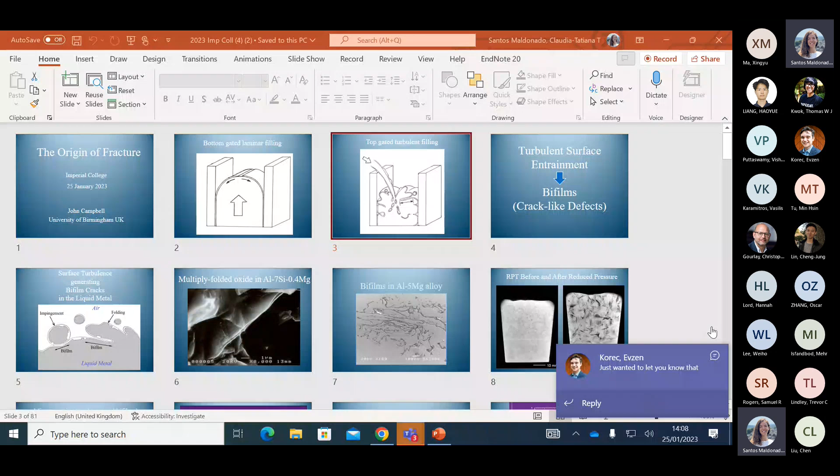They cannot see the presentation. Ah, sorry. Share. Thank you. It looks the same to me.

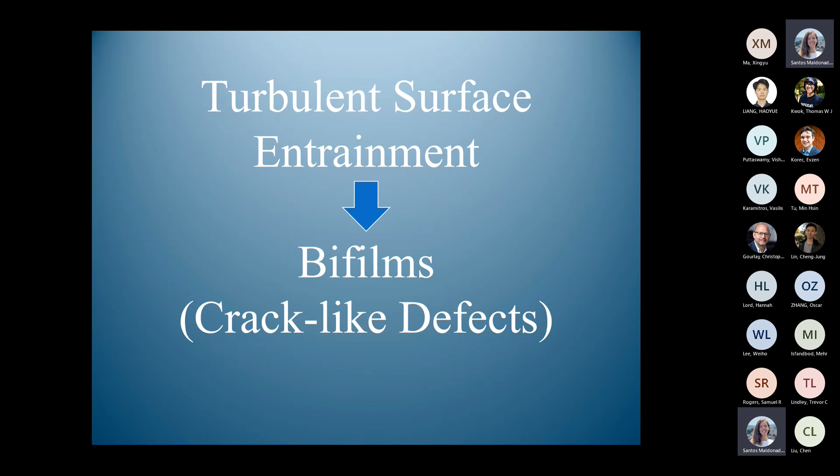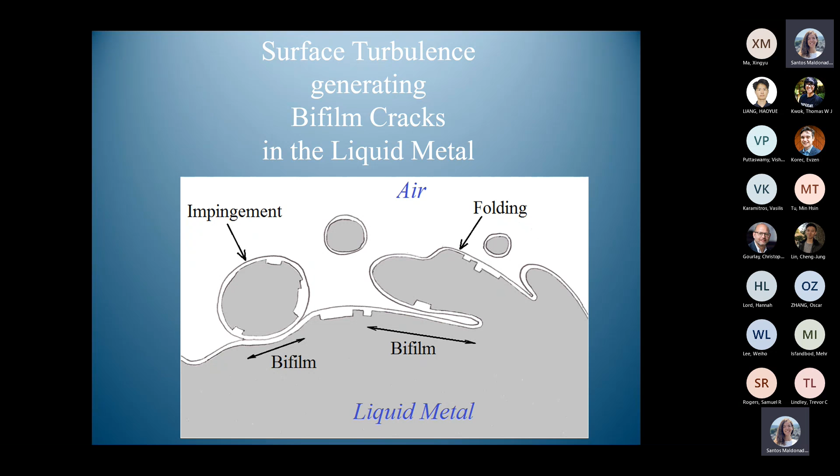Anyway, so this is the reality of our pouring systems. The turbulent surface entrainment leads to bifilms, which are kind of crack-like defects in the liquid. Here's another instance where a folding action produces the bifilm, but also an impingement action leads to a bifilm. All these things lead to double films coming together, dry side to dry side. It's fundamental to the way entrainment occurs. When the surface goes in, it always goes in dry side to dry side.

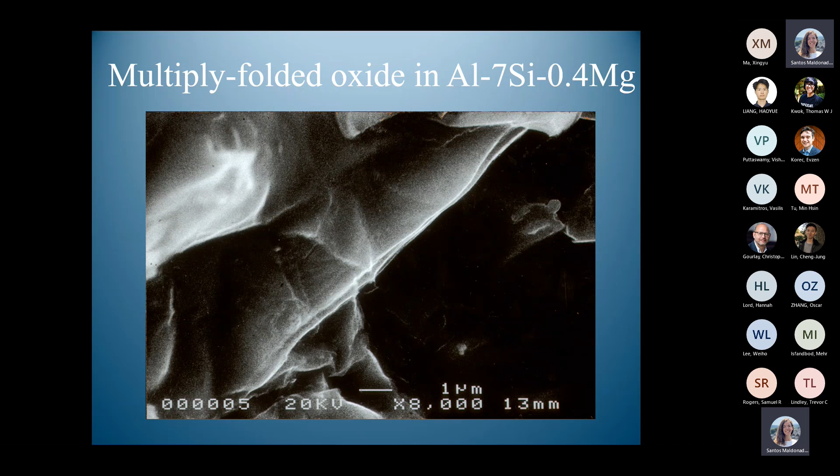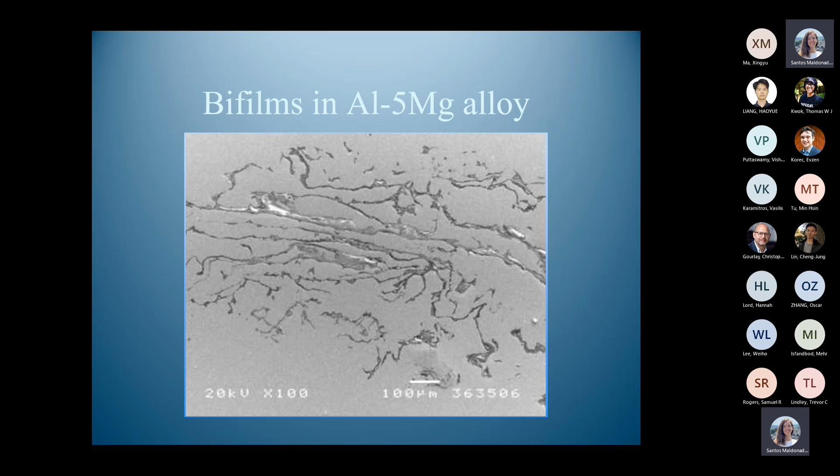And here are some of the things under the microscope. You can see this is multiply folded, and the tiny things here are about 20 nanometers or something. Here's a situation where we've polished the surface, revealing this big tangle of bifilms. Here we've just taken off the top of the film so that you can see the film underneath in places. So it really is a double film.

This was a little experiment that was extremely valuable and helpful to us in the early days, done many years ago. We took two small molds about the size of egg cups, and we poured liquid aluminium into both molds at more or less the same time and temperature, so the two are identical with liquid metal. Over the one on the right, we put a bell jar and pumped down the pressure to about a tenth of an atmosphere — actually, I forget, maybe it was a hundredth of an atmosphere. But anyway, it was a lower pressure, because what we wanted to do was expand the two films apart by lowering the pressure so the air trapped between them would expand, and so we could see them by X-ray, which is what these are.

And sure enough, they popped up, and you can see it's absolutely crammed with cracks that we didn't know were there. Now, interestingly, this is the same metal, poured at the same time, same temperature, same everything, except just a different pressure.

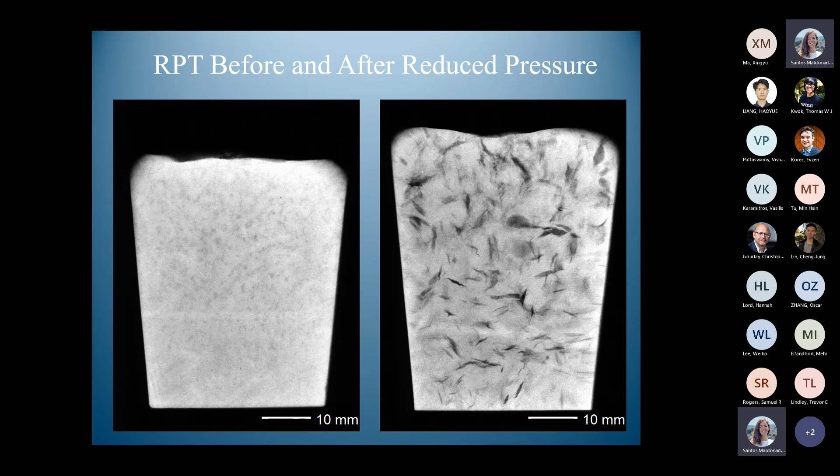When I show this picture to people in the aluminium industry, for instance, they say, oh yes, we get cracks just like this. This is actually a super duplex stainless steel. I show that because this is a problem right across the metals industry. It's not just aluminum, and it's not just steels. It's the super alloys. Nearly every metal alloy system you can think of has this same problem.

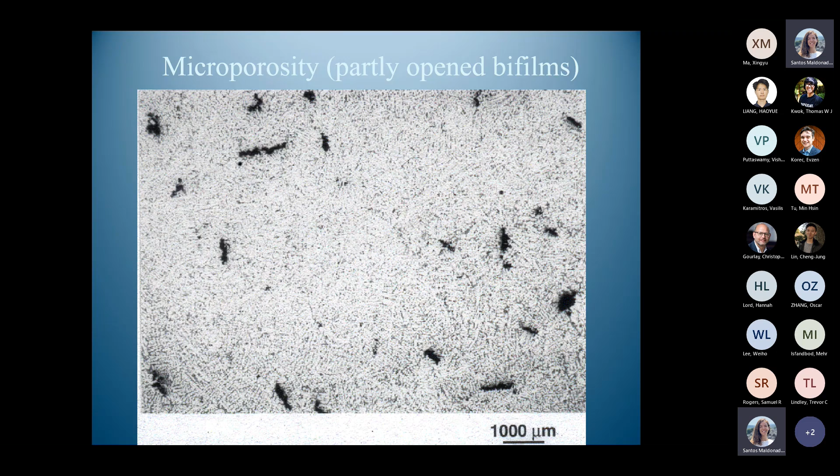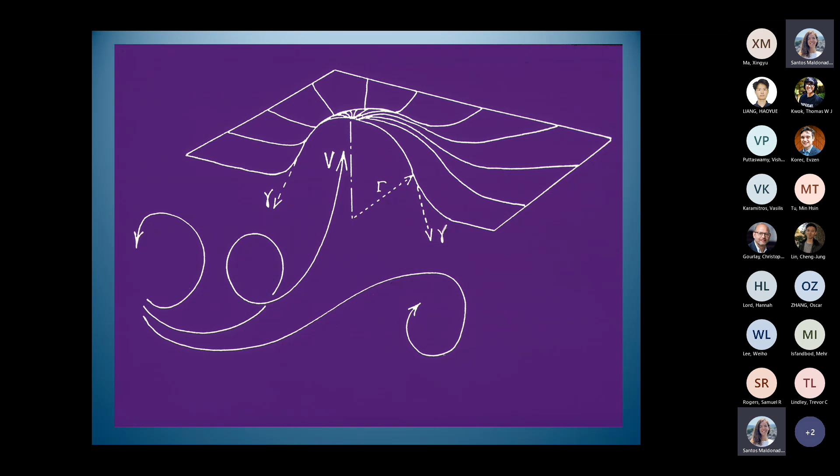We can have a quick look at the simple physics of why it occurs and the critical conditions under which it occurs. If we just look at the surface, it's being tensioned by surface tension to keep it flat, but it's being perturbed by turbulence in the liquid, with a certain velocity. We can write down the critical condition at which these two forces, the inertial pressure in the liquid and the surface tension pressure, become equal.

And we get a critical velocity of 0.5 meters a second. I produced this on the back of an envelope and said to one of my students, do you believe this? He said, oh, no. I said, neither do I. So anyway, I asked him to go off and test it.

He took a small casting about the size of my phone, brought the metal in, went under and came up into the mold underneath at different speeds. Then we subjected this to some dye penetrant to count the length of cracks. And then we took the whole casting and did a 3-point bend test on it to see how strong it was.

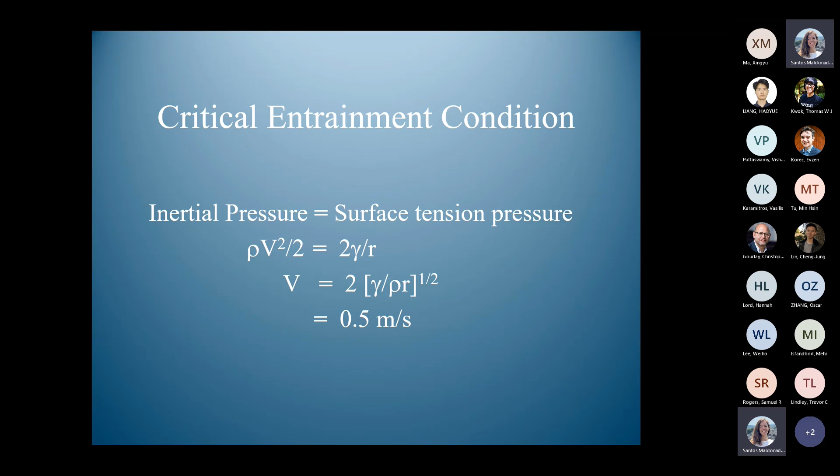So these are his results. These are the crack lengths, and this is the velocity here. Up to 0.5 meters a second, there were no cracks that we could find. And suddenly at 0.5, cracks appear, and then nothing, something, nothing, something terrible, nothing more or less.

So here is chaos. And it's interesting to see chaos on plots of graphs. Here you would expect chaos, because this is now being controlled by turbulence. The turbulence is something that's rather chaotic, and sometimes the metal will jump one way, sometimes the other, or may not give you a crack.

So this is an expected behavior. But down here, the castings you make are safe, free from cracks. And then when we looked at the strength, we had good strengths up here, and then a cliff edge, and then awful strengths along here.

It was this result here, these two castings, that really alarmed me. These two castings had virtually no cracks. They looked perfect on X-ray, and they could have gone out from the foundry, and the aeroplane could have been hanging from the sky on these two castings, but the strength wasn't there.

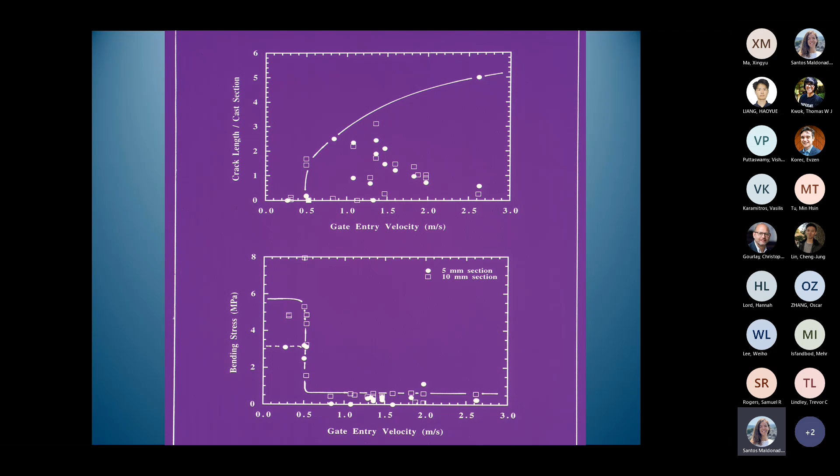These are two of the castings. This one has got - well, when you bend something, you expect a crack to go along the axis of the bend. But there's not one crack on the axis. There are these cracks just slightly off the axis, one going down here, another going across here, another down the back you can't see. And that gives you the clue as to how they formed.

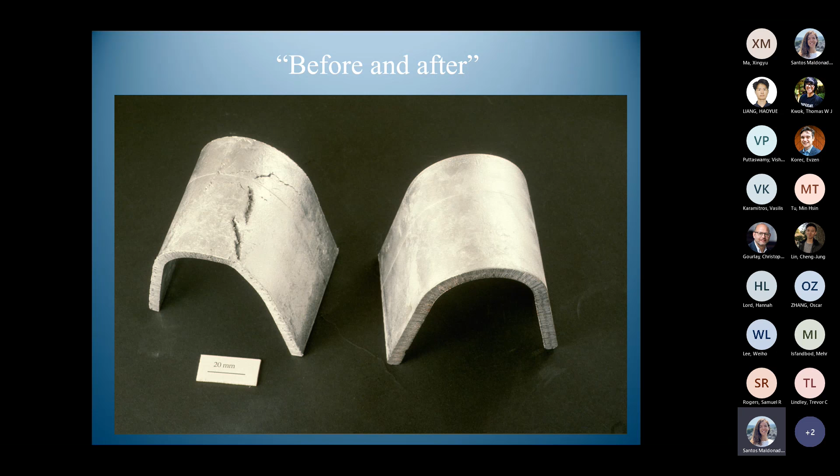It's the randomness that tells you this is due to the randomness in the way the liquid jumped and splashed inside the mold, creating these cracks in the liquid state, which then get solidified in. This one was done at less than 0.5 meters a second, so that was safe - no cracks.

So if we look at the properties and the microstructures, this is one of the ways in which, when we first pour, the bifilms are scrambled into the liquid in a compact way, but then the grains start to grow. Now the dendrites can't grow through the bifilm because of the air layer. So they reach the first film - there's the layer of air before it gets to the next film. Clearly the dendrites can't grow through the air. So all they can do at that point is push.

I say push - this is a colloquialism used amongst researchers. What it means is this is trembling with Brownian motion against the tip of the dendrite. So every time it moves away, more liquid can come in, and so it looks like the interface is being pushed. In fact, as it moves away, liquid can access and freeze, so it's a one-way process. It's very convincing as a pushing action.

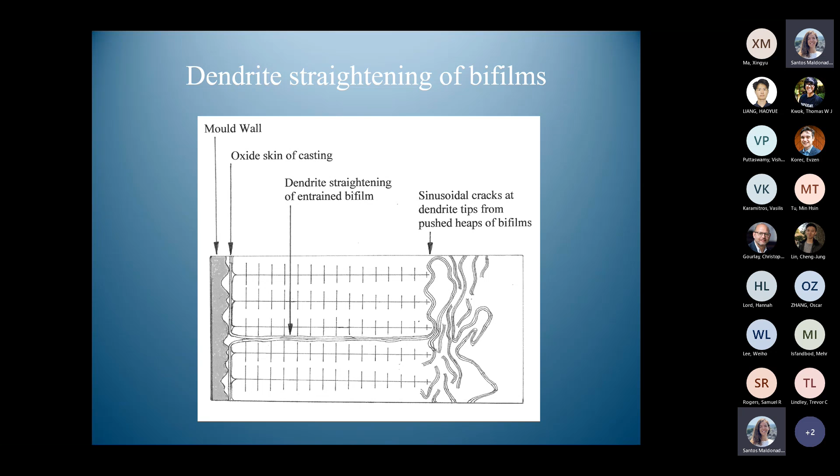And here you've got a complete mess of films that are still being pushed ahead in a heap. Here's a typical - I think it's a 6 millimeter diameter - test bar which has been fractured. And this is the fracture surface.

What you can see is that here the dendrites have grown and pushed the film ahead here, and the dendrites have also grown and pushed it here. So this little mountain range down the middle is all the spare oxide film that's been pushed ahead of the two lots of dendrites as they've grown towards the center and just piled up the film in the middle. And so these are really quite large crystals.

Whereas this is from the same casting - it's just that at this part of the casting there was a big back wave and a big splash, and big bifilms were formed. At the other end of the casting, that happened to fill nicely. So this part of the casting has all the small population of bifilms that were in the original metal before it was even poured.

And this is the trouble in the metals industry. Now we're recycling a lot of our metals. The metals get poured by all sorts of people, made into all sorts of products. It comes back to the foundry, gets melted down, and we get all its inherited bifilms free of charge. And so these things come round a second time. Very often they're scrambled, but they're something we inherit in the system.

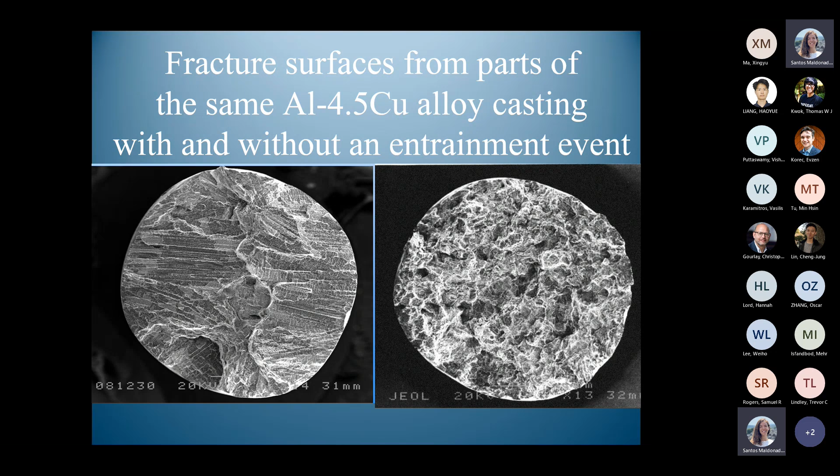Now this is different - this has got some bifilms, but some metal is to be seen. And here we are - what you don't know is you're looking at a bifilm there. And so you remember how that formed, with the two lots of dendrites growing either side. Now the fracture goes through the center.

And so now we have - I need more hands to do this - we have two fracture surfaces with dendrites just underneath the surface. And we are seeing those dendrites through the oxide film, which is so thin you don't know it's there. Which is why we think we've never seen bifilms. Nearly every one of you would have seen bifilms without knowing it.

And this is an occasion - there's a little part there, you just see it, where the bifilm is actually folded over twice. And that tells you you're looking at a film.

Whereas here, this ductile dimple structure - at the bottom of every dimple there's a silicon particle which wouldn't have fractured except that it grew on a bifilm. You remember the bifilm had the center unbonded and dry, but the outside was in perfect atomic contact. What happens is that particles, like silicon particles in the aluminium alloy, nucleate and grow on the bifilm, on the wetted surfaces, so they can grow on both sides of these things. And so when your silicon particle breaks, it's broken because it had a bifilm growing up the middle of it.

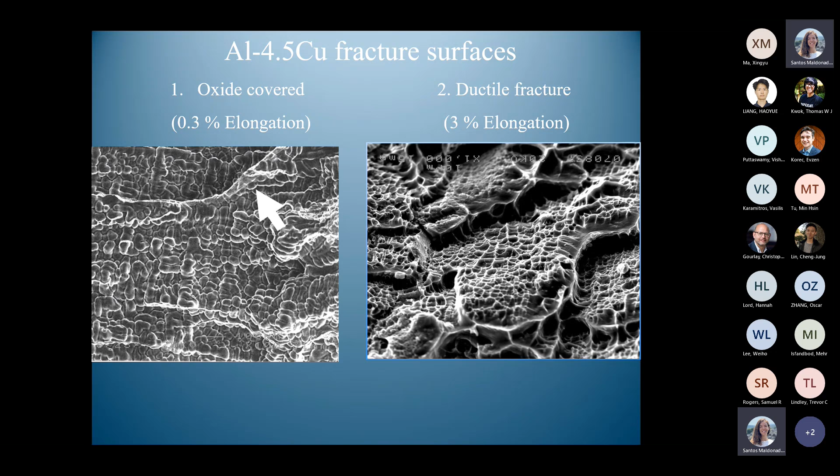Yes, here we are - here's our fractured silicon particles, and here is the ductile matrix. What you can see is the matrix is perfectly ductile because it's necked down to zero thickness. These knife edge arêtes are pretty well truly knife edge, which means that if we'd got a truly ductile material which we put into our tensile test machine and just pulled, it would neck down until it finally came away at a point, like a piece of plasticine. That would be its failure mechanism, a perfect plastic failure. Here we've got perfect plastic failures with all these knife edges around here.

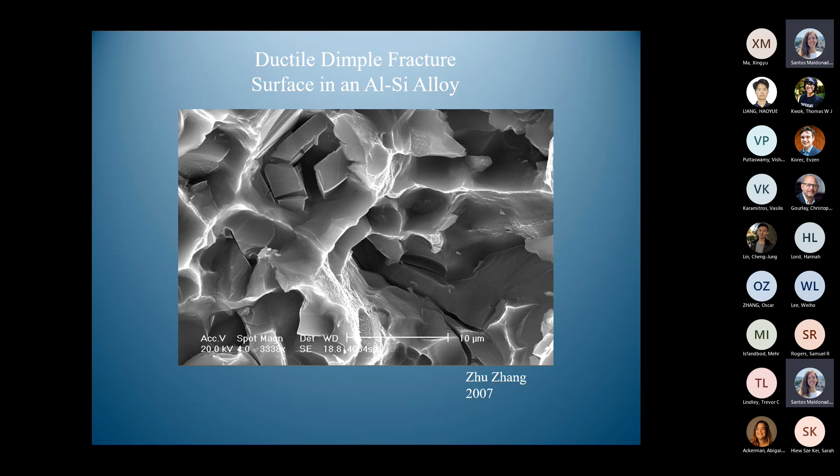Whereas here you've got perfect brittle failure, but it's not brittle because the silicon is brittle. The poor old silicon only fractures brittly because it has bifilms all the way through its center. Here's another instance of the bifilms and the way the structure of inclusions relates to the bifilm. In every case, in fact every time I've ever looked into any inclusion or second phase, it always nucleates and grows on a bifilm. Now, someone at some stage is going to find an inclusion or a second phase that doesn't nucleate on bifilms, but I haven't found one yet. Maybe they do exist somewhere. But here, they certainly grow because they nucleate and grow on bifilms.

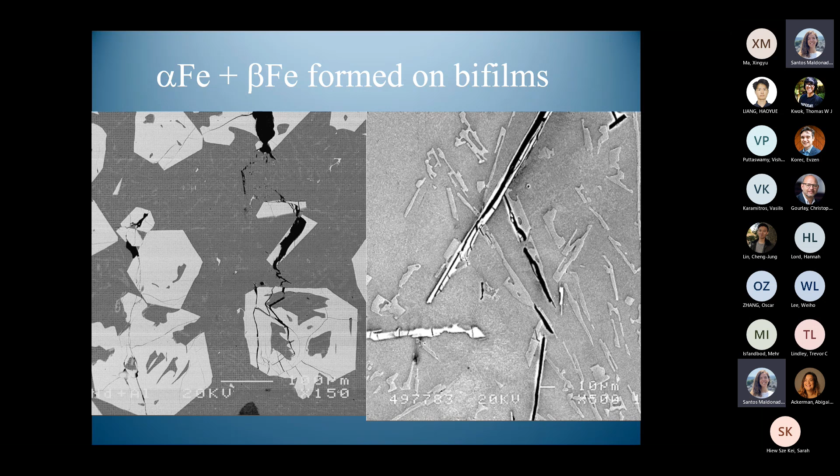And now you have a completely different situation - you have a much better property because you freeze in your bifilms in a convoluted manner. You can see how they're all wrapped up inside here. Even so, some of the bifilms escaped into other particles, but basically most of it is raveled up and unable to escape. Unfortunately, as I say, not all of it gets ravelled up, and some of it still remains to bring the properties down. So the bifilms are still a damn nuisance, frankly, because they do affect properties, even though you do your best to wrap them up with the metallurgy.

And here's another instance where the beta iron has grown long crystals, and here's one. But here, the beta iron has only grown on half of the bifilm and straightened the half out. But on the other side, the beta particle is on one side, but on the other side nothing happened to grow - nothing arrived there to nucleate. So that was free as an oxide film to wander off and do whatever it wanted. Of course, as for instance the hydrogen increases in these regions, the hydrogen will blow it off, or if there's shrinkage here, it'll actually suck it away.

So suck it away like this, but there are dendrites here, and so this second film will start wrapping itself around dendrites. That's what's happening here. It's being pulled away here and pulled into the dendrite mesh.

So the bifilm is clearly a very good initiation point for porosity in castings. But frankly, the porosity is a secondary effect. The bifilm is the primary problem and the primary defect. Porosity is a secondary issue which the bifilm can give you, again, free of charge. Costs nothing, can make the casting as bad as you like.

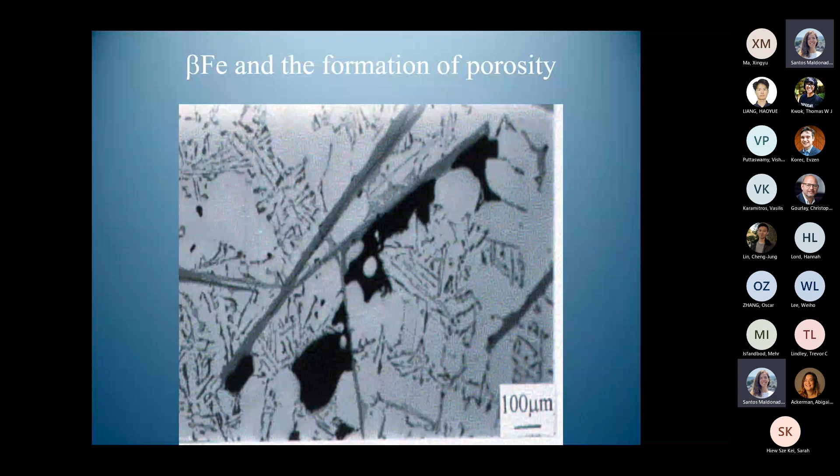And these are some of the fracture surfaces. This is in a magnesium alloy. I mean, they're just amazing structures, which, as I say, very often on a fracture surface, you're not seeing any metal. It's always you're seeing half of the bifilm.

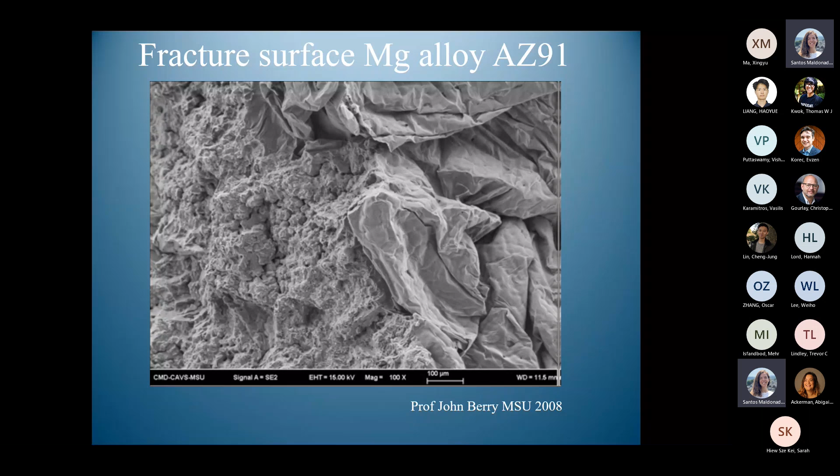And here again, this is the same magnesium alloy, and now the bifilm's in a much more crunched up situation. But although this is obviously a film, all of this as well is again bifilm. It's just that it's been crunched up incredibly small. But as I say, everything you're looking at is one of the bifilm films which has come off on that side of the fracture, and the other film from the bifilm will be on the other half of the fracture.

And here is a very bad piece of metal turning in which we cast this nickel-based alloy. This is a beautifully ductile nickel-based material, but we cast it really quite badly in the early days before we knew how to cast the stuff. And what you can see is it's full of bifilms because the person turning had turned with a rather blunt cutting tool, and the cutting tool has torn open the bifilms on the surface. It's sort of ripped them open to make a really bad surface. And you can see they're everywhere.

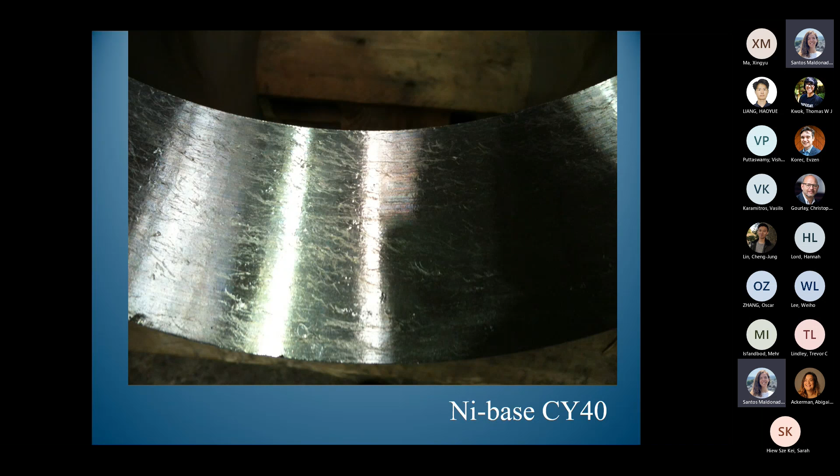This is another shot from, again, I think it's the same nickel-based alloy. So, okay, that's a little bit of background of the metallurgy. Let's look at the casting technology to see what might be done about it.

Now, I don't know whether any of you have been into a steel foundry, steel works, seen steel poured. Well, if you haven't, if ever you get the chance, you must go, okay? It's one of the most frightening experiences you could have. When you see the furnace being tilted and pouring out the steel, this great heavy liquid is thundering down, much more impressive than Niagara Falls. And it's so heavy and it's coming over, and it's just the most daunting thing you ever could possibly see. But of course, it's manufacturing bifilms like there's no tomorrow.

Okay? So the steel in the furnace, this is a little arc furnace here, about a 5-ton arc furnace by the look of it. The steel in the furnace would have been really quite good because it sits in there for some time while it's treated and get the composition right and the carbon out and whatever. So it's been in there for about an hour or so, during which time, in this very shallow bath, there's plenty of time for nearly all the bifilms to float out. So your steel's in really quite good condition in the furnace.

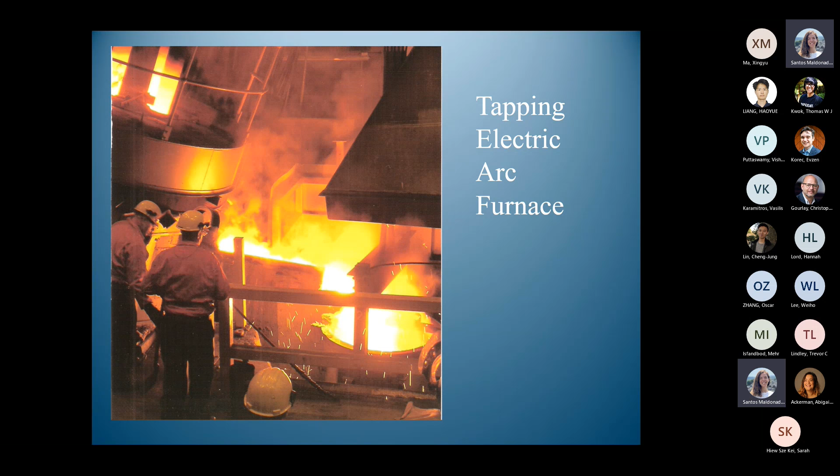Even though you've got out all that number, there are still millions or billions left, unfortunately. So the steel never really gets over that first pour. A lot comes out, but a lot stays in. And this is why our steels will never be much good while we have this technology of melting in a furnace and pouring through a height of 3 meters or so into a ladle. And there's got to be some serious rethinking about how to redesign steel making equipment.

It's not just steel—see, this is the aluminium industry. It's not this chap's fault that what he's overseeing is a bifilm manufacturing process. We're completely destroying the quality of this metal by pouring it through this height of a couple of meters.

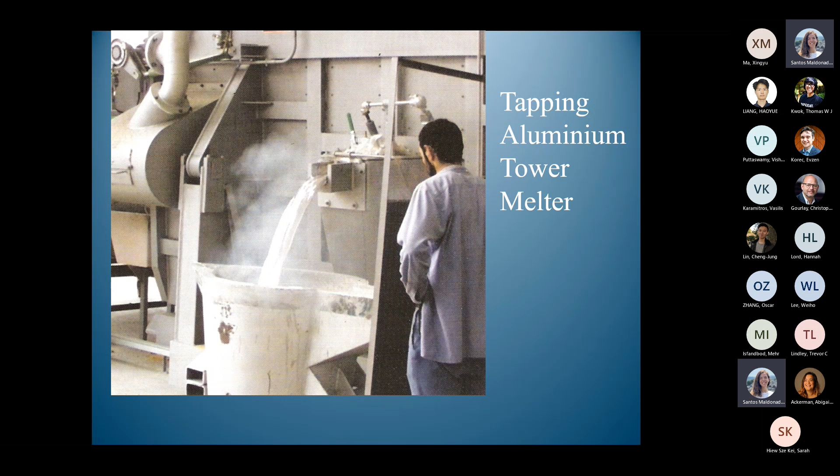The fault is that our metallurgical industries are fundamentally wrongly designed. Now, if you want a job for the future, there's an opportunity—huge amounts of work need to be done in the metals industries to sort them out and do better than this. One of my big jobs is working with operations to set up better casting methods where we don't pour, where the metal only moves by the counter-gravity method—the special method where the surface oxide never enters the matrix.

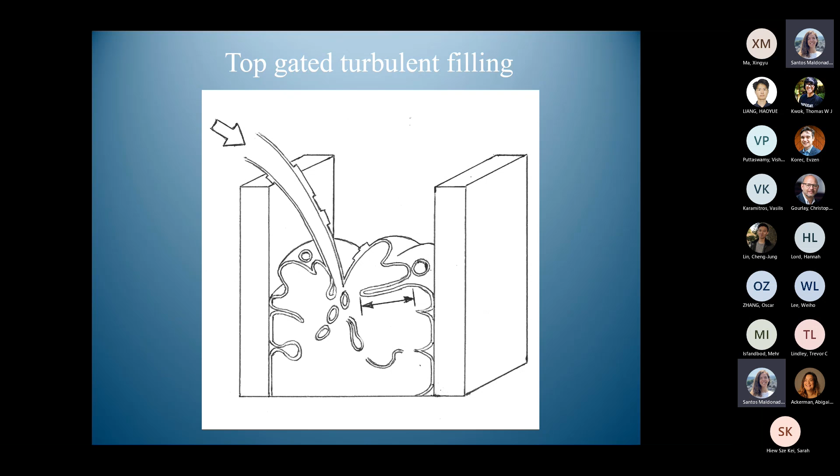So let's talk about some gravity filling systems that we have at the moment, just to give you a feel for where the industry currently is. This is where we are, making all this mess. It's very important to know that in vacuum melting, every vacuum melting and casting unit pours with gravity.

So every vacuum melting furnace makes bifilms and destroys the quality of the metal. You may say, how is that possible? It's in a vacuum. But melting and casting vacuums are different to other people's vacuums.

You may have microscopes with wonderful vacuums, but they don't occur in the metals industries where you're melting metals, and they cannot occur. The metals industry is doing its best, but when you've got molten metal sitting in a refractory container, the refractories are outgassing so fast that the vacuum pumps can't keep up. So your atmosphere is like dilute air—that's all it is, it's a terrible vacuum.

Every time you pour—like this furnace, this is just a laboratory furnace, like you'll have here in Imperial College—they're going to pour through some height. This height H is the critical damaging feature. All your castings will be full of bifilms, in fact exactly similar bifilms as if you had poured in air, because the geometry hasn't changed. So your bifilm geometry won't change.

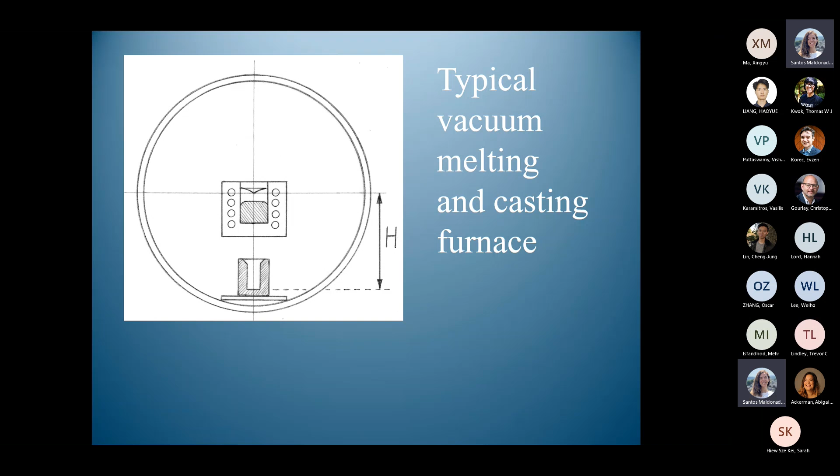And in fact, I come across more and more failures from vacuum castings with people just pouring these horrible gravity pouring systems. The vacuum is a snare and delusion. I could make a better casting by pouring in air carefully via a good running system—much better than that machine can do.

If I come in at the parting line, because this will be made in a two-parted mold, it's very common in the industry to come in at the parting line. But then again, in here it's going to fall a bit—I haven't talked about the height of fall.

Remember the half meter a second, the theoretical critical speed. What I say to my own students is: how far does the metal have to fall, accelerating, getting faster and faster under gravity, before it reaches half a meter a second? How far does it have to fall? Have a guess—a meter? Any advance on a meter?

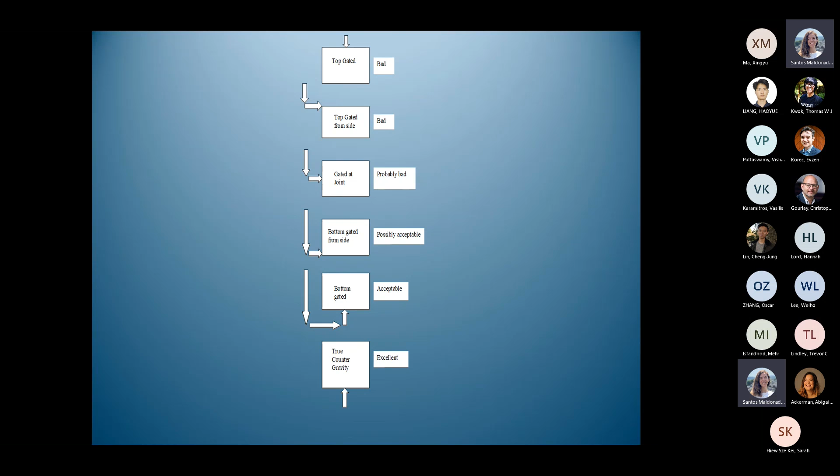That's the way we make castings. That's the way I try to make castings nowadays, and that's the way I design foundries. They are miraculously different from foundries where the metal's poured. So, counter-gravity systems.

Here we are with our magical, wonderful filling mechanism, which is a natural process. And thank God there's a natural process we can fall back to, which works beautifully.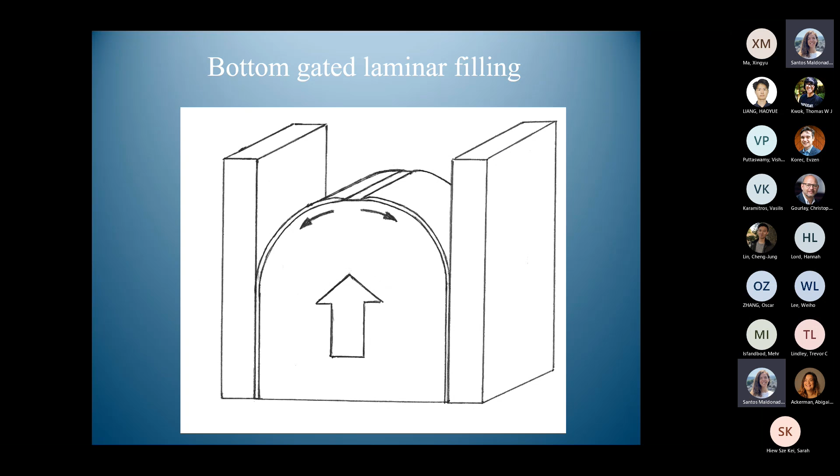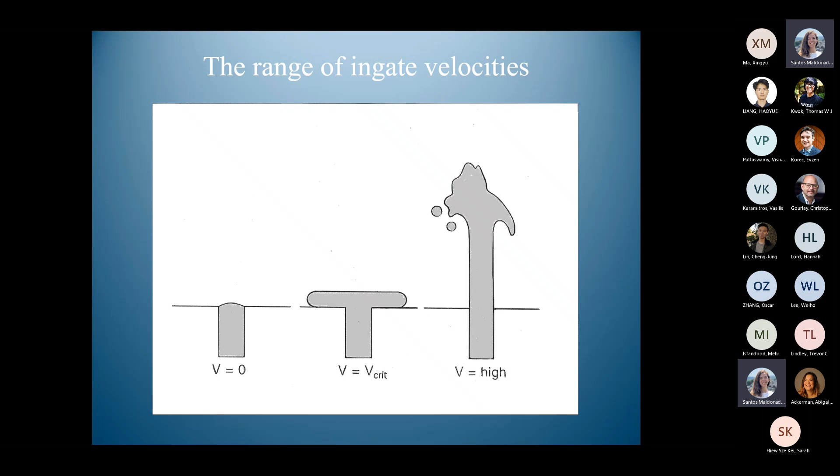We do have to get the velocity right. For instance, if we keep the velocity at zero, the metal is very safe, nothing happens to it, but it's not very good for making castings or any products really. If we come in too fast, the metal jumps up in the air, falls back, churns away, and we're in trouble again. The critical half meter a second is just that velocity at which the rate of rise of the surface is always held in place and in check by the surface tension of the metal. And that works beautifully.

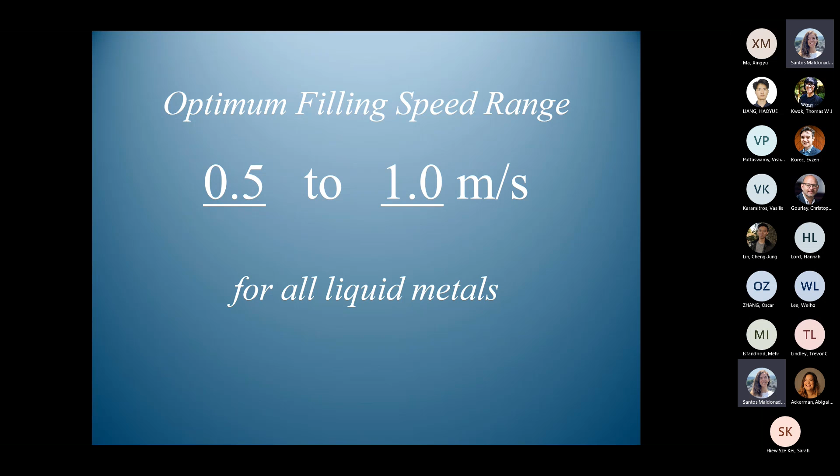This is the condition I use. The half meter a second is theoretically correct. This is where John Campbell pushes the system to, and can get away with it, but it's a risk. By the time you get up to 1.1 or 1.2 meters a second, you know you're going to have problems.

So here's a machine, which is a counter-gravity machine. You've got the metal here. You can put air pressure into the furnace and force the metal uphill, counter-gravity, into a die. Then you wait while it solidifies. When it's solid, you open the die, take out the casting, close the die, and then the next metal goes in. What could be simpler?

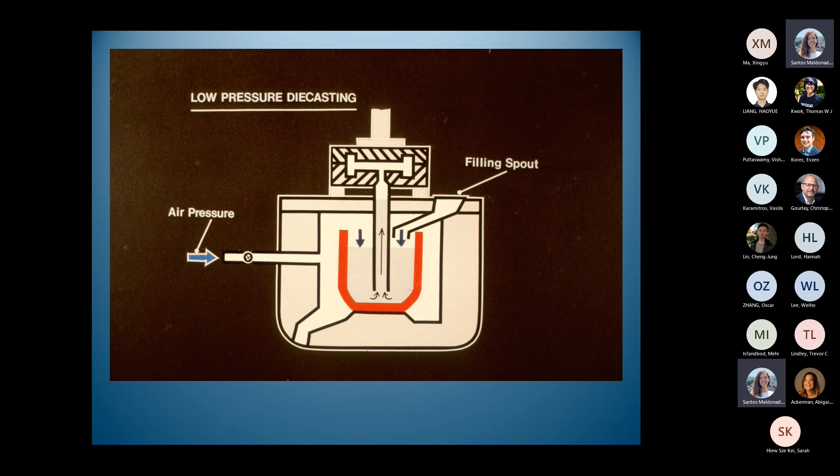Anyway, it's completely no good. I wouldn't have one of these machines if anyone wanted to give me one. The reason is, in reality, the metal arrives on the forklift truck and tilts, pouring into the filling chute with terrible turbulence. There's a lot of damage. And then it pours again, falls again here, does even more damage to the metal. And all this damaged metal is then pressurized up the riser tube to make a casting as bad as possible.

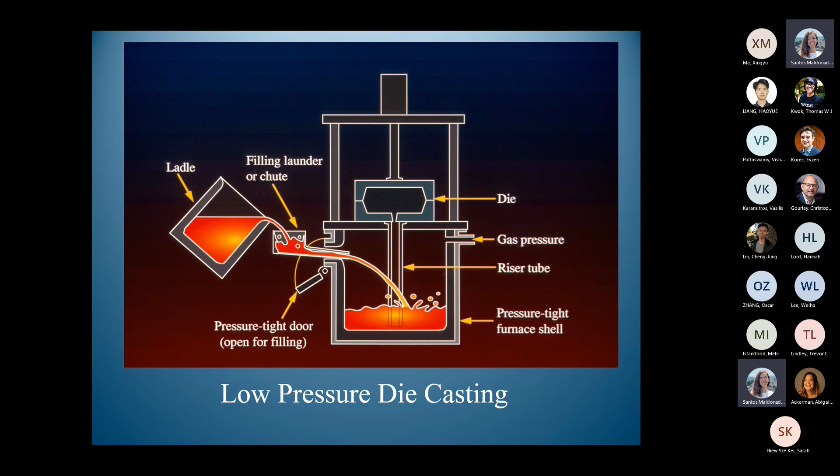Now, if that weren't bad enough, after it's solidified, the die's open, the metal's taken out, the die's closed again, the gas pressure is reduced to zero, and the metal immediately falls back down and goes whoosh at the bottom. All those bifilms which had settled out harmlessly on the bottom are now whooshed and stirred up again to make sure they all go back into the next casting, making it as bad as possible. It couldn't be worse if you designed it to be as bad as possible. This is a horrible machine. I won't have anything to do with it.

So this is what I built. This was made for the Cosworth racing engines, and frankly was a godsend to Cosworth. It really got them out of trouble. They finally got engines which finished over the line instead of breaking down halfway round, or worse, 50% of the engines failed by fatigue on the test bed. They never even got out onto a racing car. So when you're losing 50% of your engines to fatigue, that's a recipe for going broke very quickly.

Anyway, when this machine came along, it never once pours metal. The metal only ever goes uphill with the pump into the mold. From the day this machine came into being - actually the Mark I machine to be truthful, but this is similar - no engine ever failed again. So we went from 50% failures on the test bed to zero overnight.

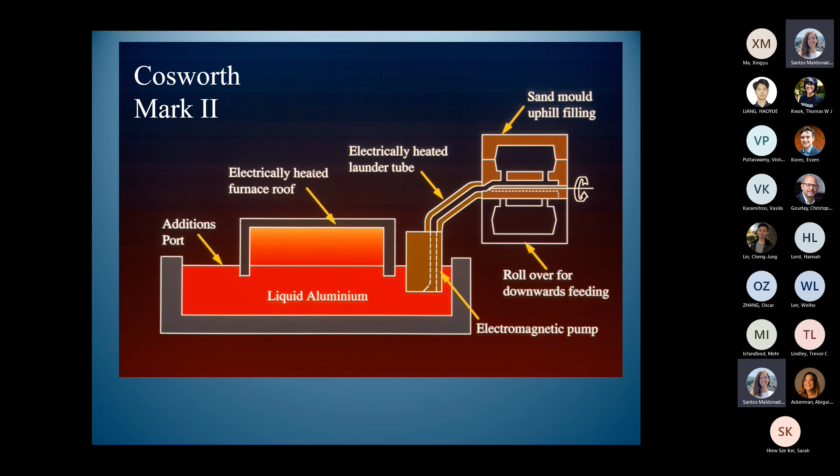The old internal combustion blocks, which are now soon to disappear, but for a time, and still today, this is the fastest machine in the world, beating high-pressure die casting for instance, and makes far better blocks as well. I mean, the blocks don't fail.

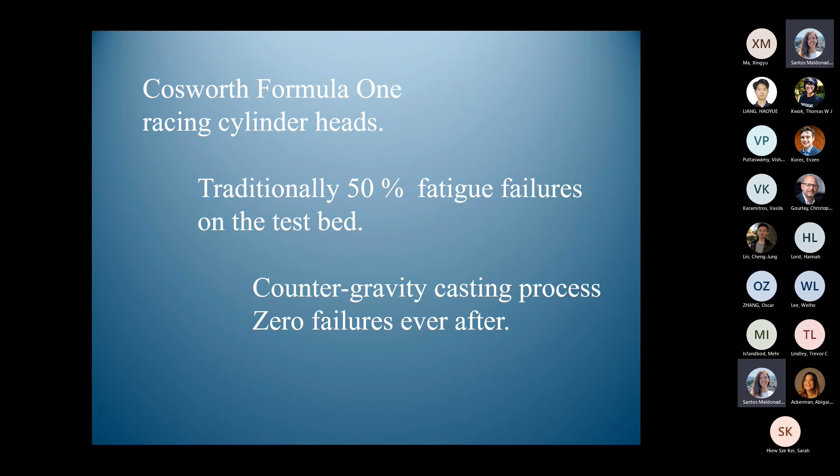So this, 50% fatigue failures and 0 failures afterwards, this was my first big success to prove that something like bifilms were really happening.

Now, I see we've got an interesting situation where I'm going to run out of time massively. You know, some lecturers have no idea, you know, you think they would know better. And I'm just wondering what we should do about that. Should I come back next month with the other half next month or something? Well, welcome to, I mean, it's just a question of what we do about it.

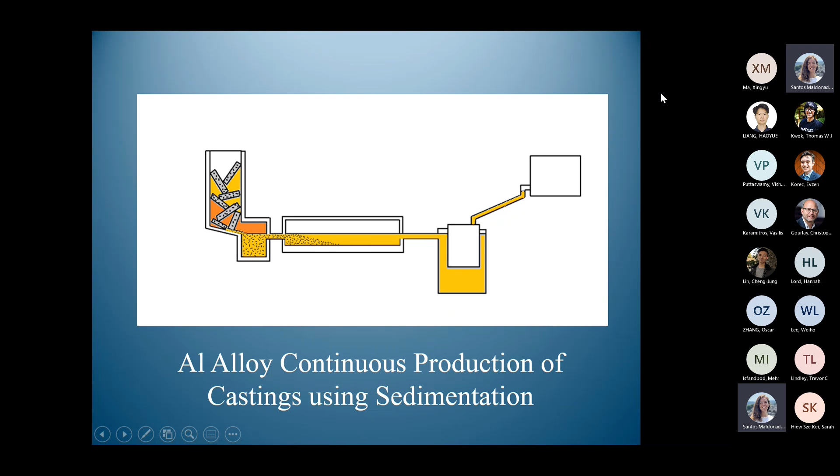Well, actually, it was very interesting. Thank you. Other questions online? Yeah, okay, yes. So we have like this one: with such a slow filling speed, are there any trade-offs in terms of the features that can be attained in the casting? For example, premature solidification along thin features. Yes, I mean, these are good questions. I can forward it to you, and then maybe you can send me the answer. But it was very, very interesting. I'm looking forward to the second part, with all the solidification findings.

Would you like me to answer? It was like for Thomas. Can you email those to me? Yes, thank you. I'm just going to stop recording.

Hello, excuse me, if you have some time, just one question, you don't mind. Before coming here, I was actually working for a steel mill company, and my question, before coming here, I was working for a steel mill company. Oh yeah, and what happened? I was in research, metallurgy department, and we have hydrogen embrittlement testing.